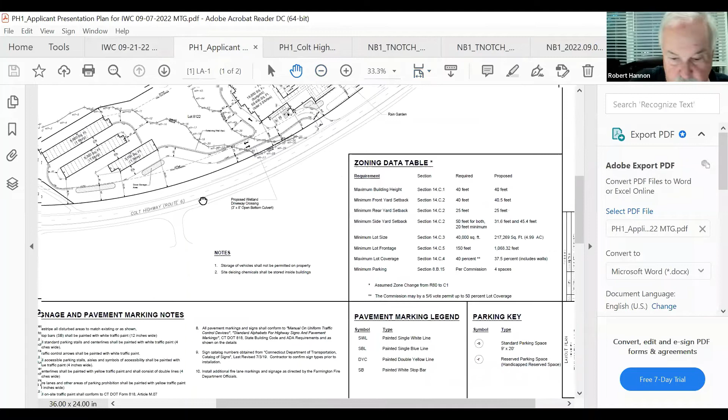Good evening, Mr. Chairman. I'm going to start off our presentation this evening. This is Robin Pearson, attorney with the firm of Alter and Pearson in Glastonbury, Connecticut, representing the applicant. With me tonight is David Ziaks of Hesketh and Associates, who has been the lead person on this application. I believe Anthony Zemba is with us as well. He is here, good. Yes, he is a certified soil scientist and ecologist with Land Tech, and did the original reporting filed with the commission, and is here this evening to provide testimony on the revised plans. Also here, I believe, is Matt Morris on behalf of the applicant. He's not part of the presentation, but I wanted to mention he is with us this evening.

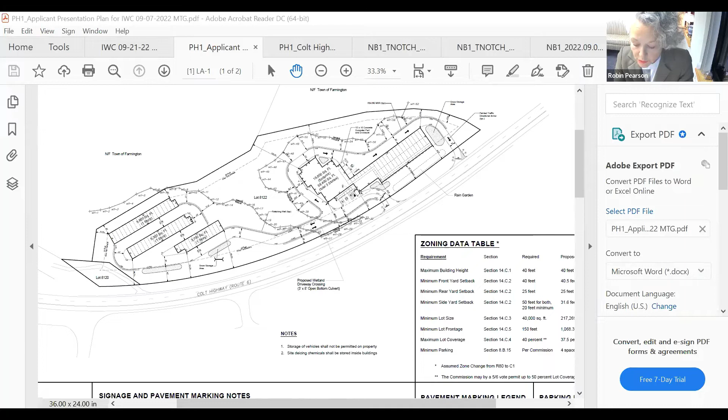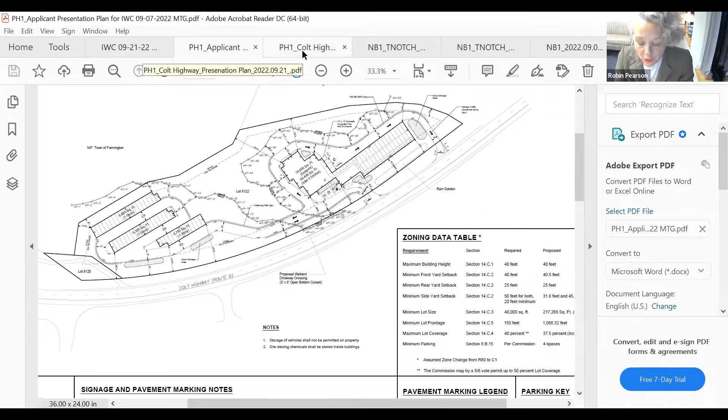So this is the third session of our public hearing review. At the last session, on September 7th, you received a comprehensive presentation by Dave Ziaks, who went through a number of changes made to the plans, primarily to increase the distance at the pinch points that exist on the plan before you that night, increasing the distance from the wetland boundary to either the foundation walls or retaining walls necessary to complete this project. He also covered peripheral issues, such as where we had now located snow storage, noted the reduction in impervious surface to 37.5% from 39.1%, and added additional information. This is not a complete synopsis of the changes, but importantly there was inclusion of pollinator plants in the wetland mitigation area along the driveway at the point of the wetland crossing. With us that evening was Tom Ryder, senior environmental scientist with Land Tech.

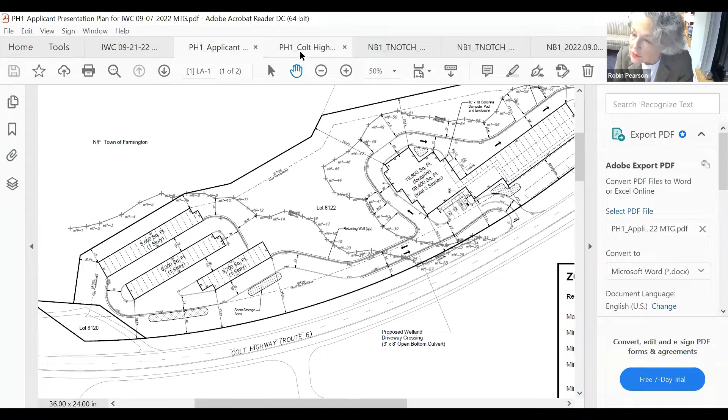I want to remind you that Tom Ryder testified that evening that he concurred with the conclusions of the Land Tech wetland report submitted with the application, prepared by Anthony Zemba, who couldn't be there on the 7th. He also confirmed, based on his review of the revised plans before you this evening, that he did not see any negative impact to the wetlands if the development were constructed as proposed. However, the commission still had additional information they were seeking, and concerns I'd broadly characterize as whether the narrow width of the crossing was acceptable and worthy of approval, and whether the building footprint's size in relation to the wetlands could be reduced to further increase separation distance. They also explored whether we could do a conservation easement.

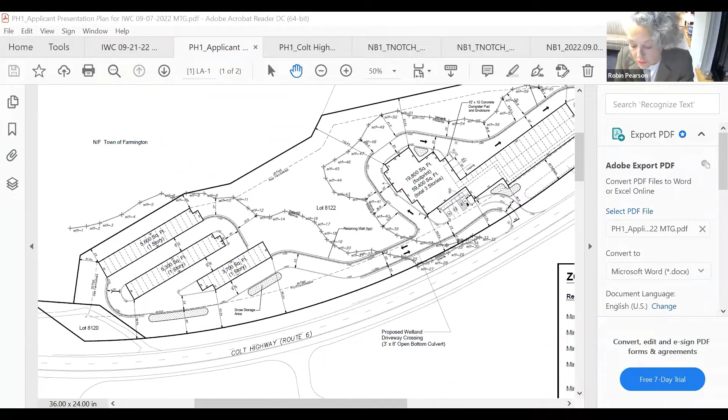David? Yes, good evening Mr. Chairman, members of the commission. I'm Dave Ziaks, a professional engineer with F.A. Hesketh Associates. We're located over in East Granby.

Since our last meeting, as Robin has been pointing out, we've been taking a look at some of the comments and recommendations from the commission. One thing we did is work with our local precast suppliers for the culvert crossing, and one of them will be able to produce an open bottom culvert that will allow us to go to a 12-foot span from the 8-foot span we currently have. We were successful in that, and we're proposing that on the plans at this time.

I just want to point out to the commission that the design of this crossing easily meets the design criteria the Army Corps of Engineers will expect from us for a general permit. It also complies with the Connecticut DEEP's stream crossing best management practices, found in Appendix G of the DEP's regulations and design guidelines for these types of stream crossings. So we'll easily be able to meet that criteria.

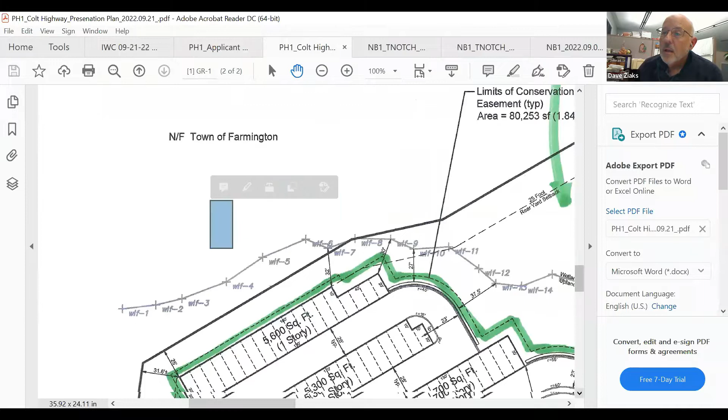One commission member asked us to look at the west end, the units closest to the wetlands, to see whether we could reduce those sizes to help with setback. We're proposing to reduce 3 more units there so they match the smaller unit at the end. That will increase our minimum setback from 30 to 32 feet in that corner, compared to the previous iteration of the plans.

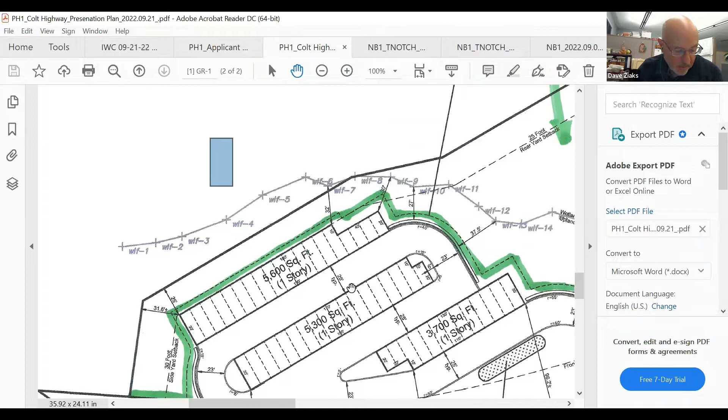As Robin pointed out, we also looked at providing a conservation easement, shown here with the green line. It's basically 5 feet in front of the outside perimeter of our development, resulting in a conservation easement of 1.84 acres out of the 4.99-acre total site. What's really good about this easement is that it will directly abut and extend the town open space to the north of us, about 70 acres of land, so that open space and conservation area will come into our property.

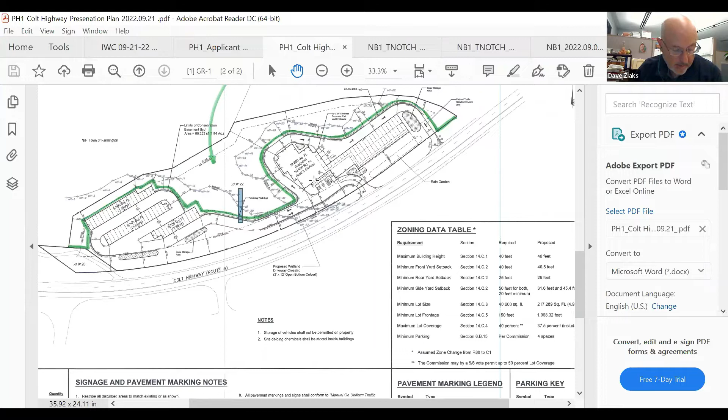The purpose of that is to ensure the commission that there won't be any future development on the remaining part of the land, or any attempt to nibble closer to the wetlands than what's shown on our plans this evening. So in addition to expanding the town open space, it also pretty much seals this property off from any future development.

There was an outstanding comment from the town engineering department, and we were able to make design modifications to the drainage system so that we capture and infiltrate the first 1 inch of runoff draining to those systems. That's an added design feature that brings us pretty much into compliance with the MS4 guidelines the town now operates under in its general permit with the Connecticut DEEP.

In general, we've made several changes to the plans to increase the setback, as Robin pointed out. We've added 2 small mitigation areas between the Route 6 corridor and our southern retaining wall to help mitigate the crossing. We've increased the culvert size — we originally started at 36 inches, and now we have the 12-foot span. We also started out with extensive use of retaining walls to minimize our encroachment into the footprint.

I think we've been very effective in that. Again, these retaining walls are not particularly tall — maximum height is about 6 to 7 feet, and that's only in certain areas. Lots of the retaining wall is less than that in height.

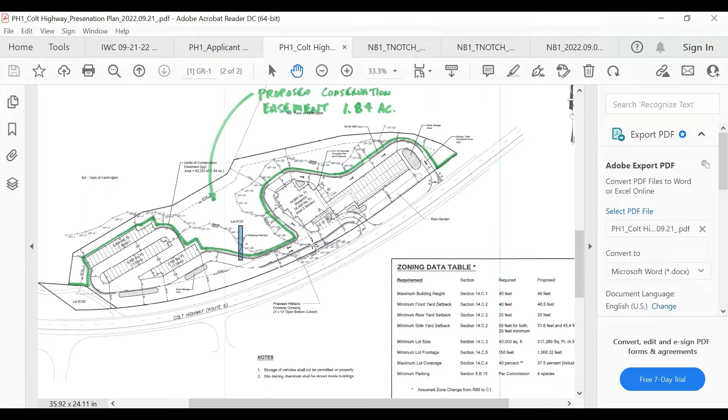No, the units on the westerly side were reduced from being 30 feet deep to 20 feet deep. But what that does is increase the distance from the units to the flag wetlands, 30 and 32 feet. Yes, I think you can see it in the labeling there. It's a little tough to see on Zoom. Yep, I see it now. That's much better. All right, I can see it much better now. Thank you, oh good, thank you.

Was that it, Mark? That's it, no other further questions.

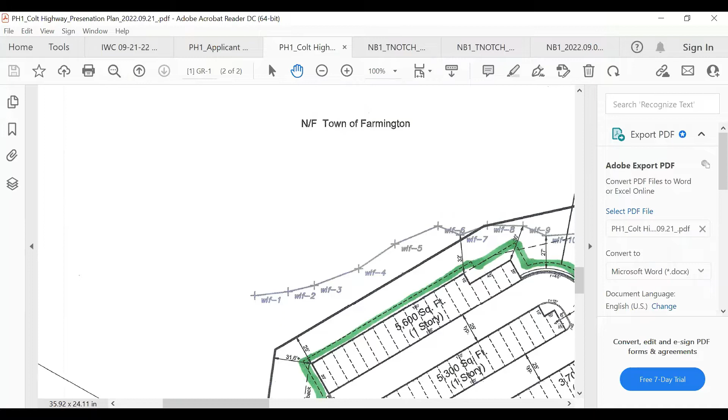I have one question, sort of an off-the-wall question, hopefully a simple yes or no. When you were laying out the design, it looks as though the portion on the east side of the property is like 19,000 square feet per floor. Is that correct, or a little over 19,000? Okay, 19,800 square feet. Yes, Mr. Chairman.

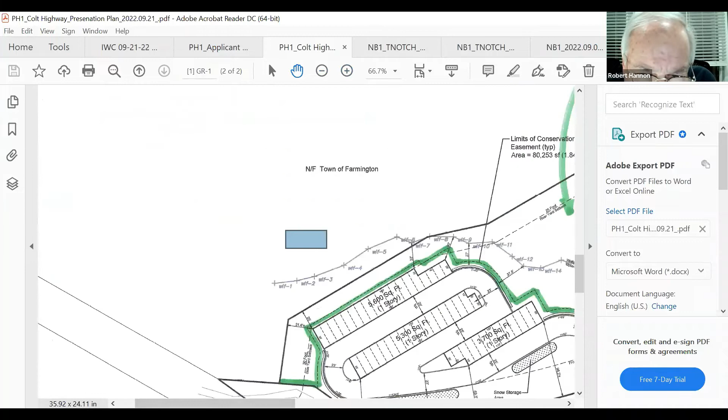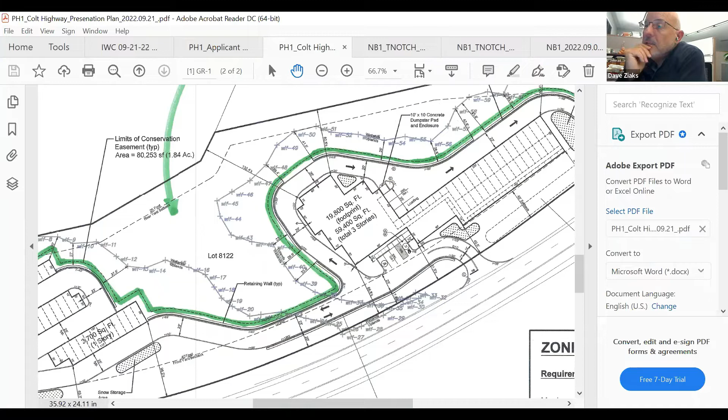Okay, was any thought put into maybe going four stories high and not having to cross the wetlands at all, to get a little bit more storage out of the area? There's been some talk about going to four stories, but the issue is we have a 40-foot height restriction in the zone. So you end up with less desirable storage facilities for the tenants due to the height limitations at four stories versus three stories. No, I just thought I'd ask, because that could have been a good mitigation measure of not even having to cross the wetlands, so I figured I'd ask to get it on the record.

I do not have any other questions.

Bruce, is there anybody from the public here? Let me check, sir. No, I don't have anyone from the public. But if anybody else would like to speak, just raise your hand. Nope, I don't see anything.

Okay, so I guess the question that I have for Attorney Pearson or anybody else on this group, do they have anything else they want to add or summarize?

Well, I would just like to point out, maybe Dave could elaborate a little bit more on that. He did put the information in his response to the town with the revised plans, but we did look even more closely at the wetland crossing, which is the only direct impact for wetland disturbance with this application. He did look again at the possibility of making two separate driveways and not having that crossing, but his information underscores that, working with the traffic consultant within FA Hesketh, it's really not feasible from a safety standpoint. He was able to increase the width of the culvert to make it a better situation with regard to impacts, which, once built, will be there, but the impacts will truly be temporary and are also tempered by the mitigation that's proposed. So I just wanted to reiterate that for the record.

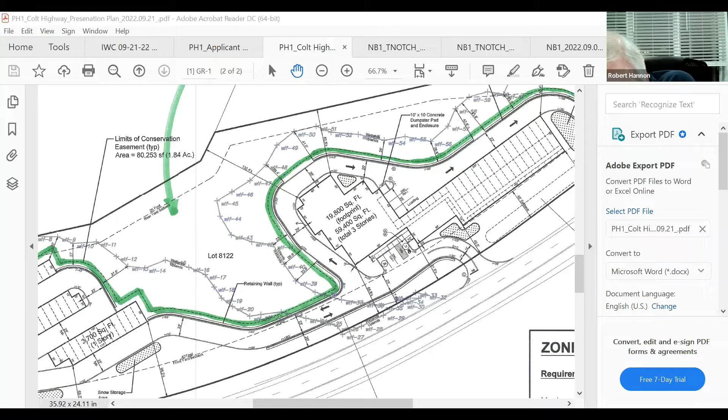So, do you want to discuss anything about that application then? In all honesty, I haven't really looked at it much in the last couple of weeks. I've been a little preoccupied with some family matters. Okay, I mean, we can talk to other members if they have any idea how they feel about it, now that all the information has been presented, we've got the last modified plan. I didn't have a chance to really look at it except for maybe about 5 minutes before the meeting, so I know that I'm not really ready to do anything. There's been a lot presented and I want to think about it. I don't know, do other commission members have any other feeling on it?

Folks ready? You looking at maybe thinking about it and trying to come up with a thought process for the next meeting? Yeah, the only reason I bring it up is just because to type up a resolution, I'd like to at least get some ideas of where we should be going with this. So for the next meeting I'll have something and then we can just add to it very easily.

Yeah, that's probably going to be the best bet. I know you've heard a lot of comments from commissioners, you heard responses from the applicant, so I think everybody has a pretty good handle of where we currently stand, especially with some of the modifications that have been proposed. So again, like I said, I'm really not ready, I haven't really thought about it. But if other people have a different opinion, I'm ready to go.

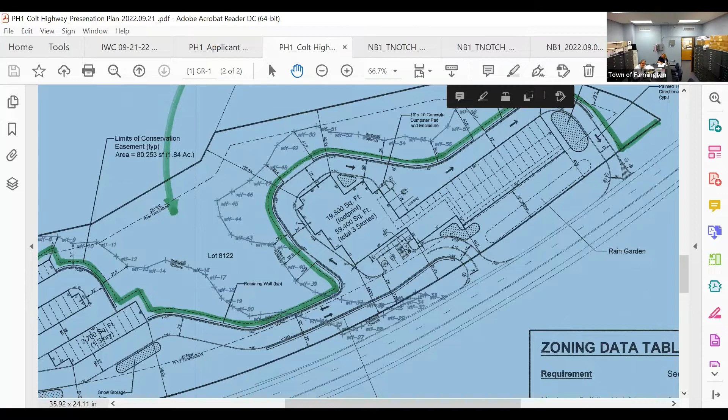And Mr. Chair, this is Mark. I think it'd be good to delay so Ned can participate in the final decision. Yeah, Sandy, will you be able to get out a CD to Ned so he can listen to everything that was discussed at the meeting tonight? Yeah, I can share the link of the recording with him. Okay, thank you. Okay, thanks, Mark.

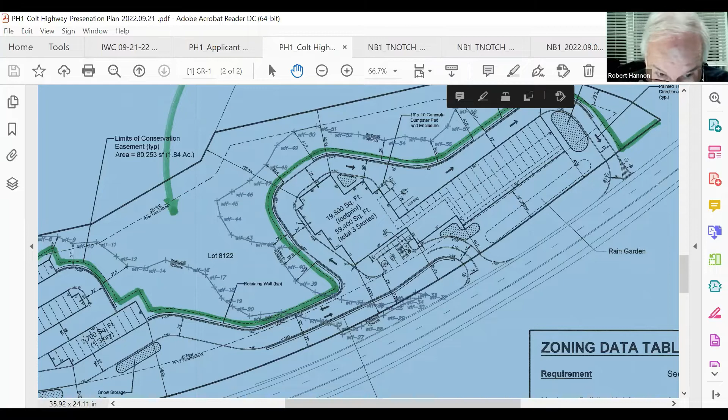Okay. Okay, so we know where we are here. Okay, go on to the next one.

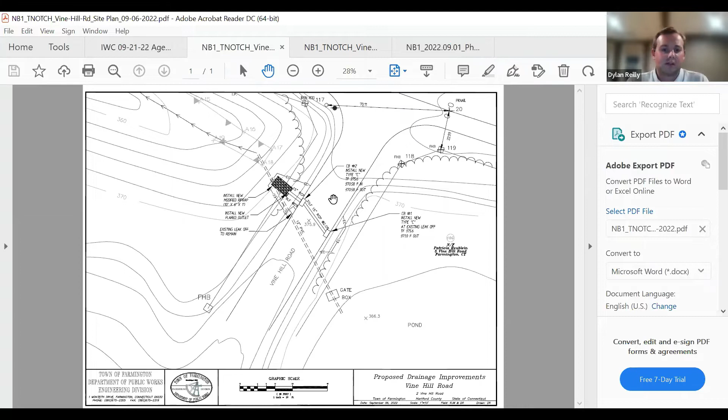Good evening, Chairman and Commission members. This is the Town of Farmington, 2 Vine Hill Road project. This is the original plan presented at the September 7th meeting. As you may recall—can you state your name for the record, please? My name is Dylan Reilly. Okay, thank you.

As you may recall, this is a rather small project consisting of the installation of 2 catch basins and an outfall lined with riprap on the 2 Vine Hill side of the road. The purpose of this project is to alleviate some of the runoff from the road that is causing erosion on both sides where the catch basin and leak off is. The leak off for the pond side is located directly under the catch basin, and the catch basin on the other side of the road is moved slightly upward due to the fact that we didn't want to cover the overflow pipe for the pond in the event that it needs to be repaired or worked on in the future.

So the remaining leak off will stay, and that's pretty much it from the old plan. Bruce, if you could go to the new plan.

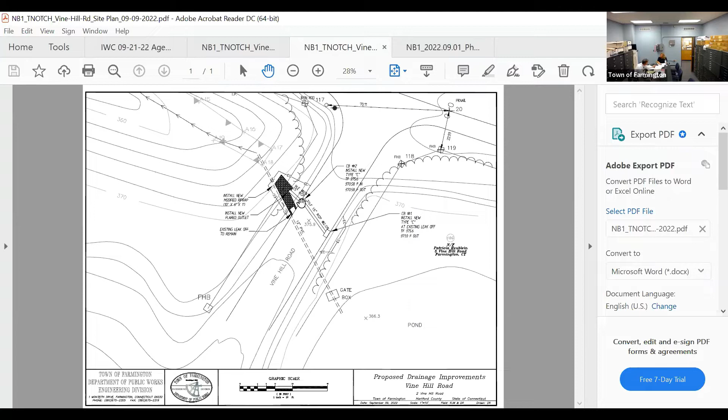Determination. Oh, sorry, I didn't get to that part. Oh, we have a determination first? Of significance? Yep. Okay, can I get, my take is it's non-significant. So I'm assuming others feel the same way, but we'll go through the list.

Rich? Yeah, I would agree on not significant. Okay. Bobby? Not significant. Dave? Not significant. Robert? Non-significant regulated activity. Neil? I agree. Mark? Not significant.

Okay, so first then, can I get a motion that this is a non-significant activity? So Rich moved. Second, Rich. Okay, have a motion. Who made the first one? That'd be Mark. Okay, Mark would be the first. Thank you. I have a motion on the floor that this is a non-significant activity. Those in favor, please signify by saying aye. Aye. Aye. Opposed, abstaining.

Okay, so now can I get a motion to approve the application as modified? I'll make the motion to approve as modified. Is there a second? Dave will second. By the way, Bobby is sitting in for Ned. As soon as Bob voted, I said the same thing. I said, oh. Just in case you were wondering.

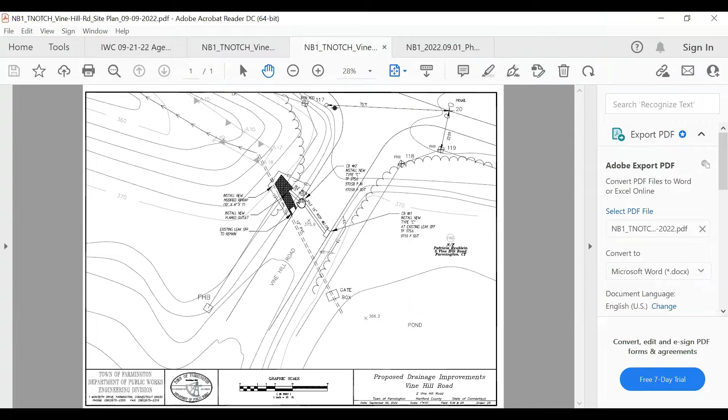No, I tried to pay attention, but so I have a motion on the floor to approve the application as modified, plans currently before us. All those in favor signify by saying aye. Aye. Aye. Opposed, abstaining. Okay, here's to getting it done before the winter. Thank you. Okay, good luck.

Bruce and Suzanne Polsky, 30 Hatters Lane. Suzanne, talked to her this morning. She's there. Are you still here, Suzanne? She said her contractor may not be able to talk till like 8:15. No, I am here, but I think Ken is on the Zoom also now. Is he? I don't know, oh, there he is. Ken, are you there?

Maybe Ken is muted. He's muted. Okay. He just... you start loading them in. Give him a few seconds. I gotta load it in. Okay.

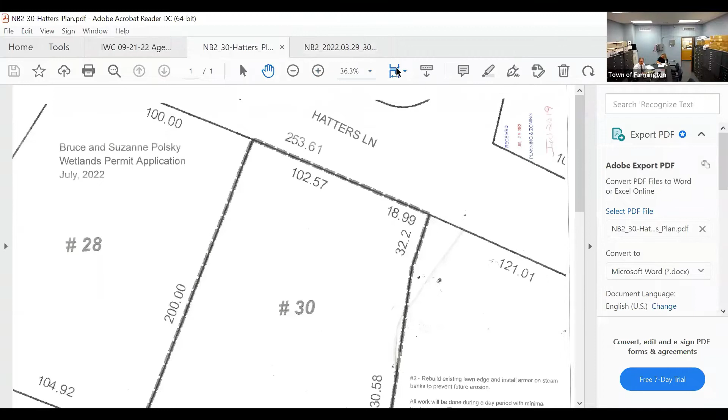I'm Suzanne Polsky. My husband and I have owned the property for 18 years. We have tried to be good stewards of the creek, but at this point we just need larger work to contain the erosion that's taken place.

Right now the creek is currently dry. I don't know what questions you might have. Hopefully I can answer them, and Ken is here to fill in the details.

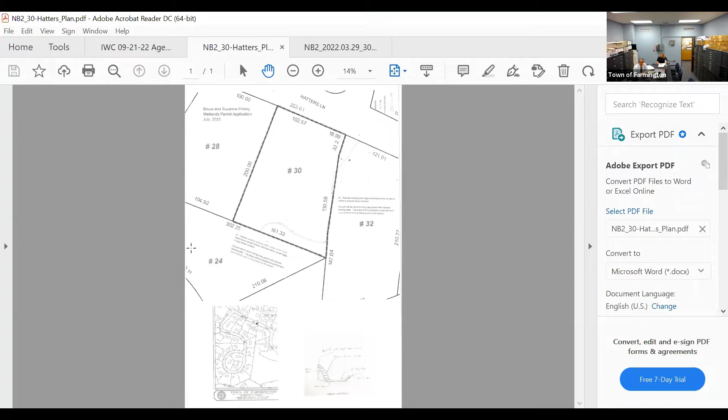If you don't mind, let me just jump in. There's an existing pipe that comes under Hatter's Lane. It's a storm drainage pipe. It picks up Colton Street and the mountain up to the north, flows along their side of the property line, comes around the back of the yard, then dips down and runs through the houses on Dorset Lane and eventually empties into the pond on Dorset Lane.

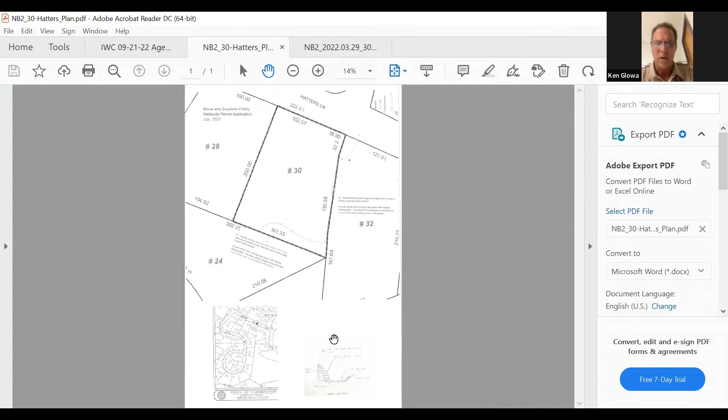Ken, is there anything you could add to how you plan on doing this? That sums it up pretty well. Basically, our plan is while the creek is dry to go in and clean a lot of the silt out and rebuild the banks with some riprap.

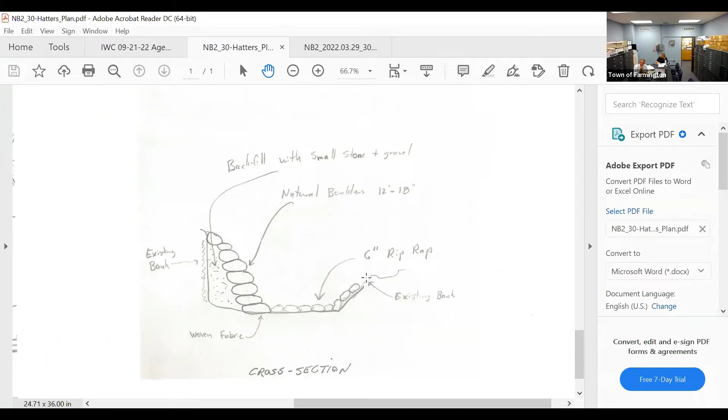You see that screen? Yes. All right, so the intention is to put in 6-inch size riprap, basically 6-inch diameter riprap. And then how thick will it be? It'll be a layer or two thick, approximately 6 to 12 inches thick on the bottom and on the sides.

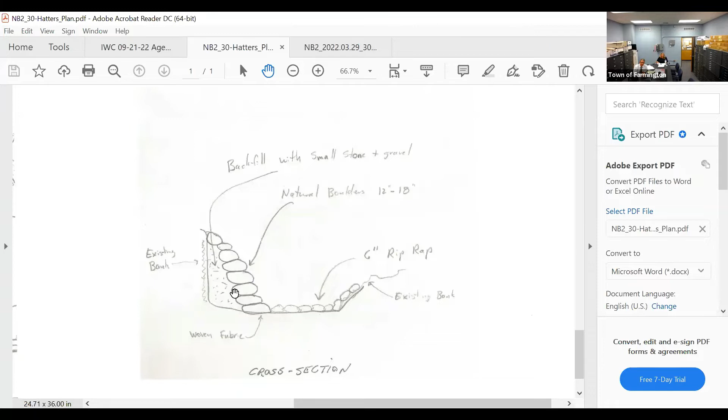And then on the pool side, you're just going to be resetting all those stones? Exactly, except this time we're going to put filter fabric behind them. The filter fabric will be on an angle like this, or will you be going vertical? No, it'll be on an angle like that. And then the areas where there's no stone, you'll have riprap on all 3 sides, bottom and sides. That's correct, since these stones are only by the pool, right? That is correct, and after that it'll just be riprap.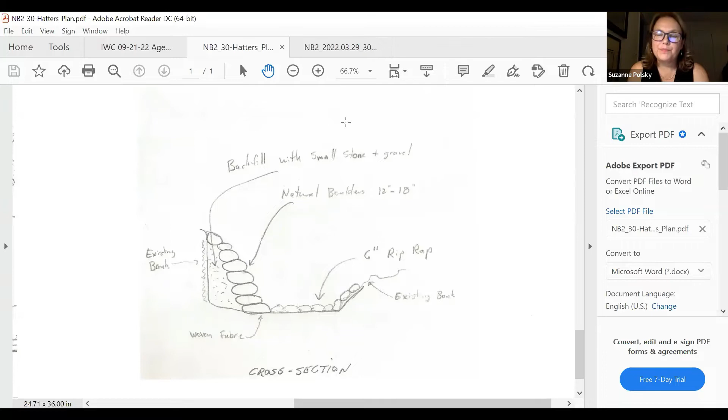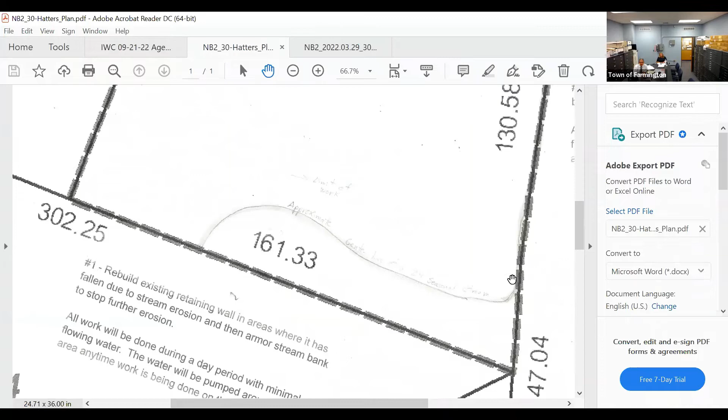But if I go back to the plan, it'll be like natural stone in here on the upper hillside. As you get past there, both sides will be riprap all the way up through here. That's correct.

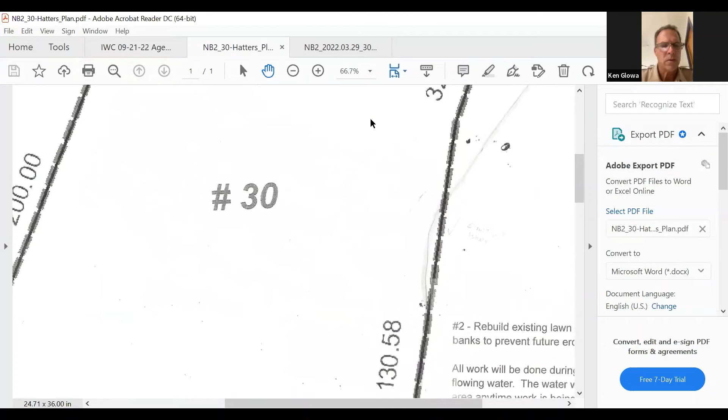And where are you guys going to stop? On which side? Up in here. Let me switch over to the photos. So you'll come around the corner. Yep, go up here, are you starting around here somewhere? A little bit farther up, closer up near the house. Oh yeah, right here, a little further up from there. Yeah, about in the middle of their house, just past that pine tree you see there.

Suzanne and Ken, any idea what you can tell the commission about the flow through there, the frequency? Well, when we get heavy rains it does come down quite fast, about 3 to 4 feet wide, the actual creek. So we get a good 6 to 8 inches but a fast flow. When there's light rain, it just trickles, but the heavy rains are what we're more concerned about, and we're getting heavier rains all the time. So it's become a concern.

Trying to determine the construction timing, when is it actually flowing now? No, I went and checked before, so it is all dry. So Ken, when would you plan on doing this work? It would depend on how this hearing went, but we plan on doing it during this time frame. We actually were trying to shoot for last month to do it when it was really dry. And when I spoke with Bruce out there, if water did start to come up while we were in the middle of construction, we would just sandbag one end and pump the water around our work area.

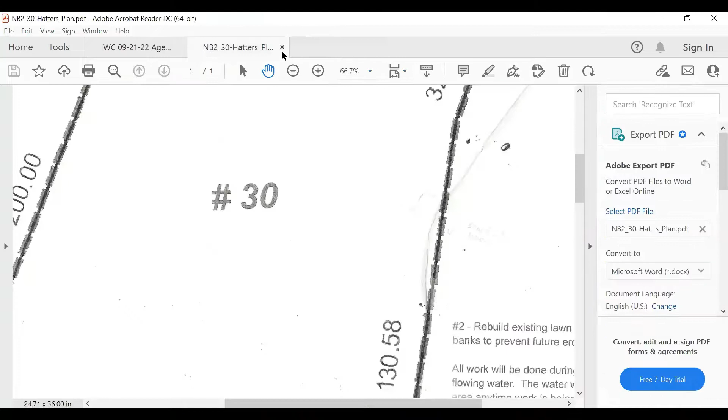And then have a motion to accept the application. So moved, Rich. Is there a second? Second by Eisner. Motion on the floor to accept the application. All those in favor, please signify by saying aye. Aye. Aye. Aye. Opposed? Abstaining? So be it. So we'll schedule this for the next meeting.

All right, thank you. Thank you. Thank you.

Number 3, 80 South Road LLC and Sager Development LLC.

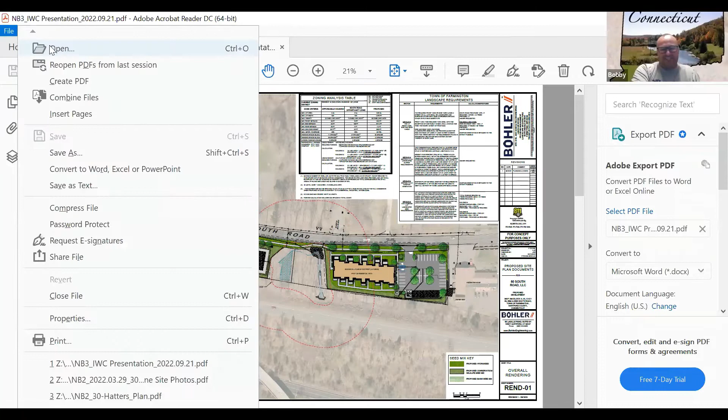I'm assuming, Bruce, you haven't changed the agenda on me this week? No, God, wow, I'm just checking. Little bitter. I wanted to make sure I was reading from the right document. Oh, wrong one, where did it go? Jeez, hold on, supposed to be the other one. He changed it, but he's giving you the wrong document. No, I did, whatever, I moved the one up. Yeah, but it's the other one they sent me. We're all friends here, you know.

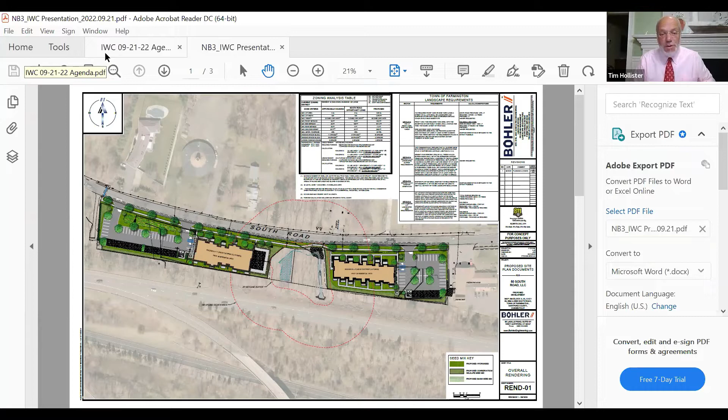Bruce, if you can't find it, we can work with this one. He's not in the room. We also can resend it through. I'm sure he's got it.

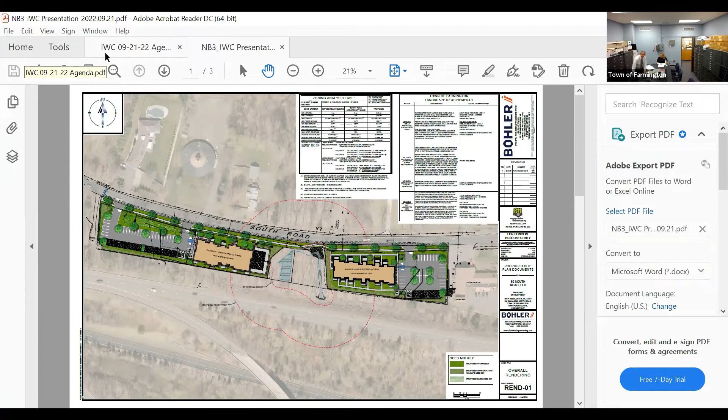I apologize to the applicant and the commission, thought I had them all in there, and I got the old one in there by mistake. Here we go, sorry about that. Very good.

Mr. Chairman, I'm ready when you are. Go ahead. Great, thank you.

Good evening, Chair Hannan, commission members, town staff. I'm Attorney Tim Hollister, representing the applicant. With me tonight are Phoebe Sager, principal of 80 South Road LLC, and our consultants Megan Raymond from SLR Consulting and Jeff Bord, professional engineer from Bohler Engineering. With your okay, we have a brief preliminary presentation, and I want to thank Mr. Sear for his help in getting this booted up.

The property is along South Road on the south side, 2.9 acres in total, 3 parcels, as you can see on the screen. The proposed development is 65 apartments in 2 buildings. Some of you may remember this site. In 2018, the western half, shown as 8864, was the proposed site of a restaurant called Andy's Italian Kitchen, on the western parcel, which was given approval by this commission as no significant impact, but that development did not go forward.

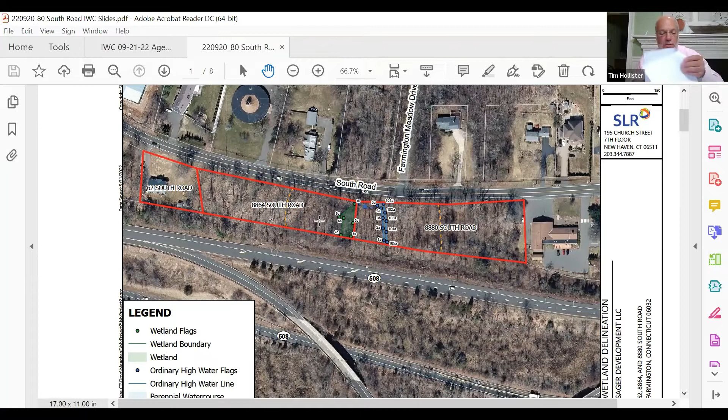Great, thank you Tim. Good evening. For the record, my name is Megan Raymond. Can everyone hear me okay? Yep, I can hear you good. Great. I'm a professional wetland scientist, registered soil scientist, certified floodplain manager at SLR Consulting, 195 Church Street in New Haven. I'm a principal scientist there and the lead of wetlands and waterways.

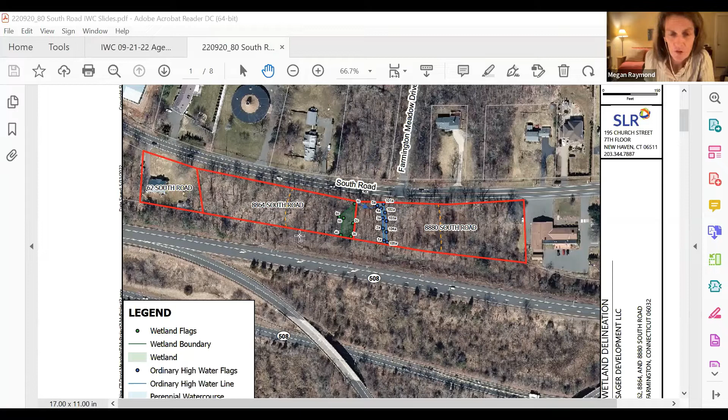This is a parcel that I became involved with in December of 2020, flagging wetlands out on 8880. Actually, I started earlier on 8864 with Andy's Italian Kitchen back in late 2017 and early 2018, with the wetland delineation on just that parcel, and was involved in the permitting process through your local commission at that time. Then the study expanded in late 2020 to encapsulate the parcel to the east, 8880 South Road. And later, in the last year, 62 South Road was added to the compendium of sites.

Megan, let me interrupt for a sec. I believe the house at 62 South Road has already been demolished. Yeah, I thought I said had. Sorry if I didn't say had, but thank you for pointing that out, Tim.

So obviously we have a very long linear piece. It's about 1,400 linear feet of frontage on South Road, and in depth a little bit over 100 feet wide. There's been various degrees of development.

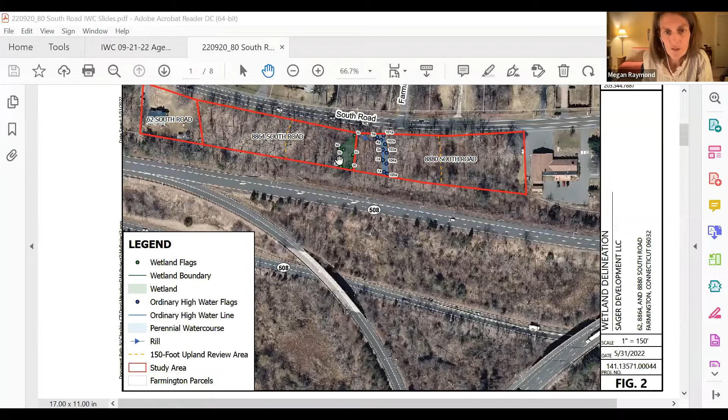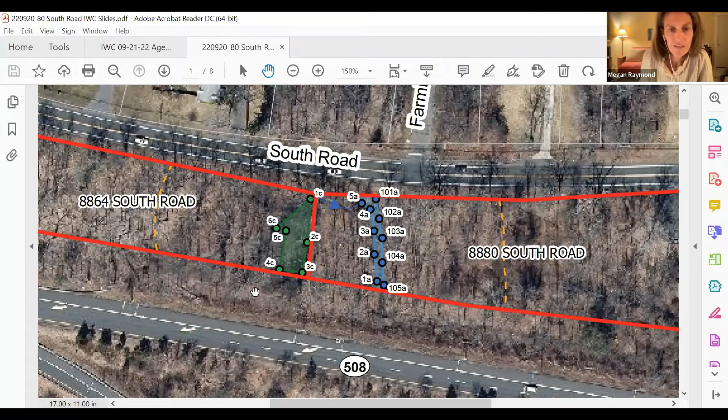And there is a wetland on the eastern portion of 8864. There's a forested depression underlain by Wilbraham silt loam soils. It's an area fed by some groundwater discharge as well as stormwater runoff. There is an embankment to the 84 connector that does shed some water seasonally onto the site from the south.

That wetland area does have some seasonal inundation, which is why we expanded our study in the spring of 2021 to look for vernal pool activity. And that did come up in the Andy's Italian Kitchen review in terms of the potential for that area to function.

But given it's a very shallow hydro period, we don't have a sufficient water column to support that. As you guys, with your experience, would see landscape position wise, we don't really have the physical characteristics of a vernal pool, nor a landscape position supporting a viable population of amphibians here. 62 South Road has no wetlands, no upland review.

Again, this small depressional forested wetland on 8864 occupies about 2,000 square feet, so about 4% of the overall 1 acre site. Moving on to 8880, we have a drainage corridor on this site bounded by ordinary high water.

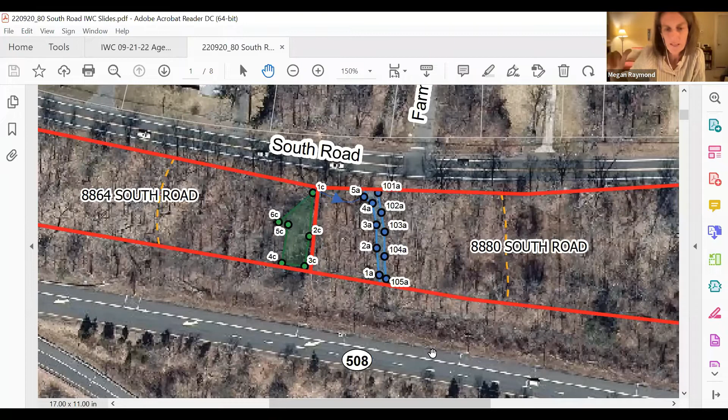It's about 110 feet that runs through the property from north to south. It exits from twin 36-inch pipes, travels to the south, and then enters twin 36-inch pipes that carry discharge under the 84 connector through the median in a pipe, and then outlets just south, kind of in the cloverleaf of 84 itself.

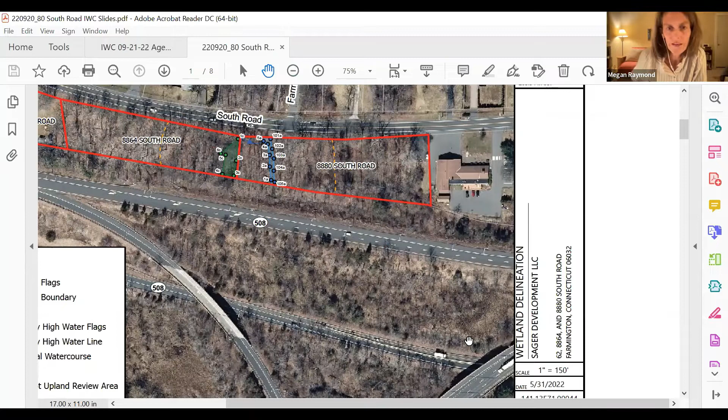From there, surface water travels about 0.16 of a mile to outlet into Batterson Park Pond, so about a sixth of a mile away. The water course is about 8 feet wide, about 3 feet deep. It's an unconsolidated base with sediment and some stones. There is a degree of riprap at the outlet of the 36-inch twin head walls.

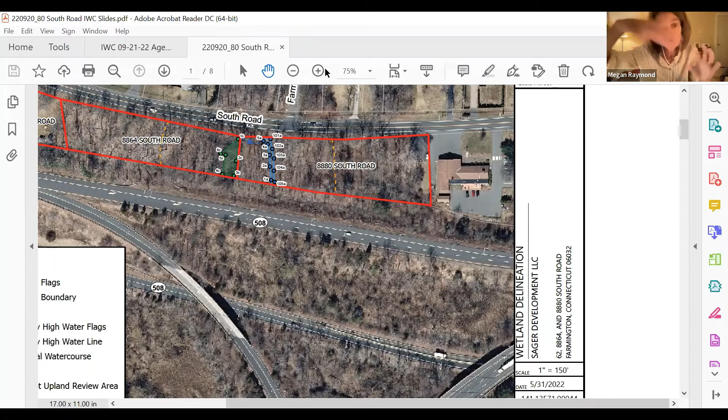Functionally, the primary function of that water course is truly conveyance. It appears to be an engineered feature. It does drain a wetland that exists north of South Road. In between Middle Road and South Road, there's a wetland system that appears to have been channelized over time, so there was some drainage conveyed, pushing drainage to the south onto the piece.

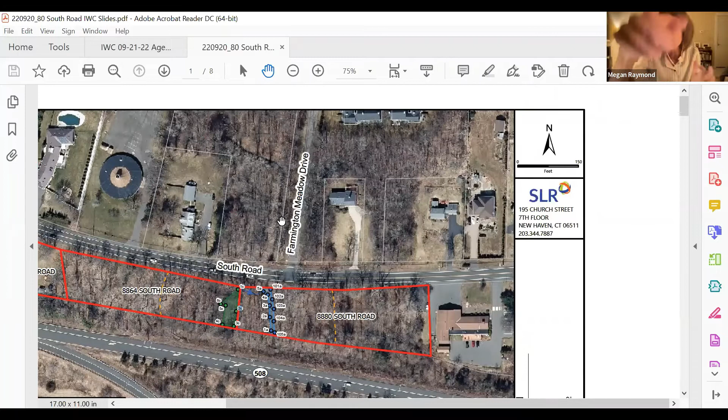The banks are quite engineered, very linear, a long linear feature. As it presents on the site, there are no meanders, no structural elements within the water course itself. So we're looking at conveyance primarily for that water course.

Moving to the wetland system on the west side of the site, we do have some constraints as it relates functionally to this wetland, just given its small size. There's not really an ability for it to contribute to a significant degree to wetland function.

However, given where it sits on the site, there is the opportunity for nutrient assimilation, obviously groundwater discharge. We have sediment toxicant retention, again, because it can hold water and store water and assimilate with some fluctuations with groundwater. We were involved in laying out the site plan, and these observations as they relate to wetland functionality directly informed some of the site layout.

And again, looking at these features, I'm going to turn it over to Jeff in a second. I'm concluding now. This wetland and water course occupy quite small percentages of the overall sites, but upland review areas on either parcel of 8864 and 8880 encumber about 40% of those sites. So at that point, that concludes my overall description of the resources, and I'd like to turn it to Jeff to get into the site plan. Thank you.

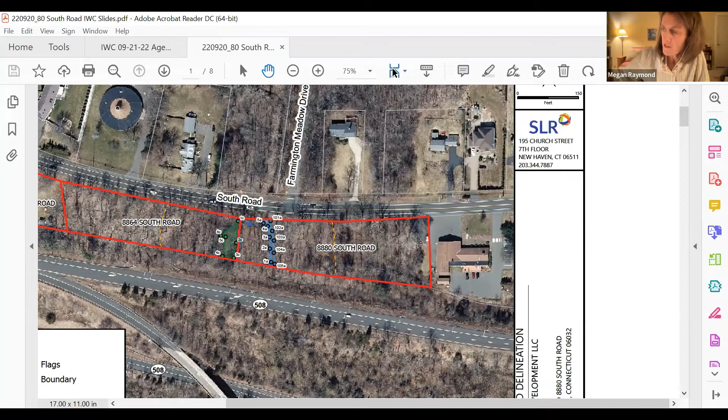Thank you, Megan. For the record, my name is Jeff Bord, professional engineer in the state of Connecticut with Bohler Engineering, located at 65 LaSalle Road in West Hartford, Connecticut.

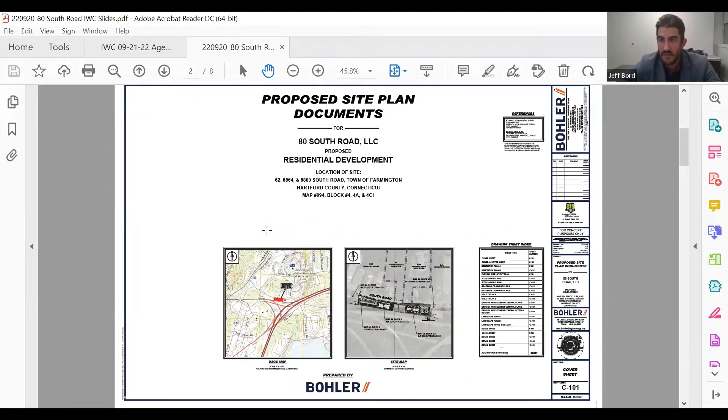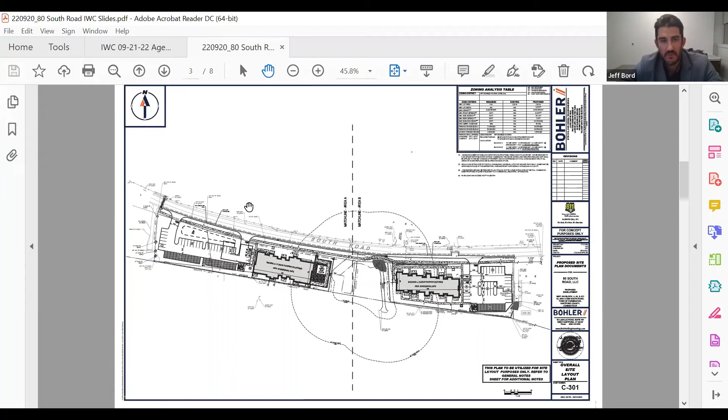What you have here before you, I believe, is just the cover page to our proposed site plan documents. It lists out everything that was in our set of drawings. This is just a black and white version. If you go to the next slide, should be the colored version—I think this one's probably the best talking one here. So what you're seeing here is just a colorized version of our site plan with an existing aerial turned on in the background.

We also provided our landscape plan on top of it, so it's the same site plan you have in your packages with a little bit more information provided. For the purposes of my presentation and testimony, north is to the top of the page.

Proposed development consists of 2 multifamily residential structures on either side of that existing channel. Building A is a 3.5-story, 36-unit structure on the western side of the site with a footprint of approximately 11,350 square feet. Building B on the eastern portion of the site is a 3-story structure with a total of 29 units, with a footprint of approximately 10,425 square feet.

Starting on the west side of the plan for Building A, we have 2 full access driveways onto South Road where we're proposing 52 parking spaces, 2 of which are handicap accessible adjacent to the building footprint itself. There's also a proposed amenity space to the east of that building that consists of porous concrete. We're currently developing what's going to be in that amenity space, but we took significant care with the existing wetlands being in close proximity to provide some unique landscaping and stormwater features that I'll get into momentarily.

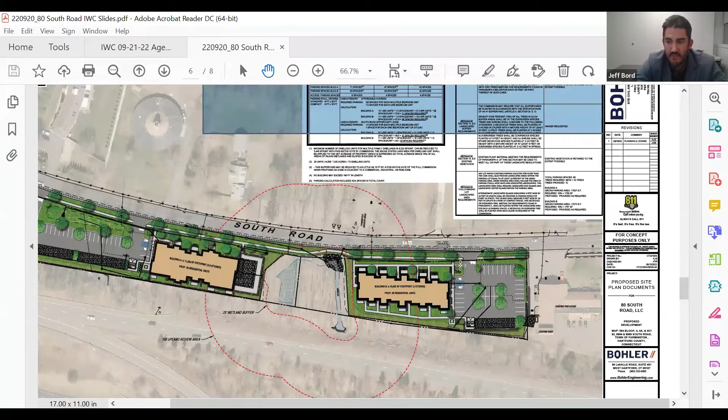It's a quite robust landscape plan given the wetlands on site. There's a variety of native species, a mix of shade trees, ornamental trees, evergreen shrubs, ground covers, and ornamental grasses. We paid particular attention to the southerly border, up against the existing channel off site between 84 and our property, and then the eastern and western boundaries in closest proximity to the culvert and the wetlands, to provide a New England conservation wildlife seed mix along that perimeter. We had coordinated with town staff, and I believe it was their opinion that we should be providing an invasive species management plan or removal plan, which we are willing to do.

Part of what we do as civil engineers is comply with the 2004 Connecticut Stormwater Quality Manual and the MS4 permit currently in place. So on a site with this many constraints and wetlands and how narrow it is, we were able to fit quite a bit of natural best management practices, as well as some subsurface practices, to meet water quality measures, treat that first inch of water quality, reduce peak flow rates for the 2, 10, 25, and 100-year storm events, and improve the water quality from what's out there today at a reduced flow rate.

Everything right now drains from north to south, and per the survey we provided, there's an existing channel between the southerly property line and the I-84 ramp that goes down to that culvert. So both sites—the Building A side on the west flows east, and the Building B side on the east flows west—ultimately get to that channel. As Megan has described, that's really a conveyance channel that we look to take care of, matching those peak flow rates and also treating water quality at the same time.

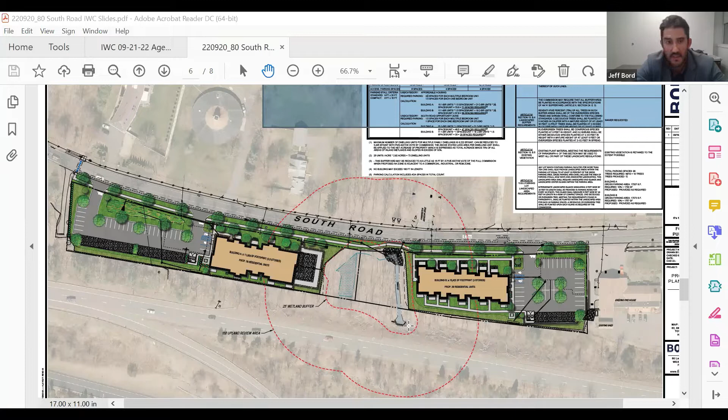Another big thing in working with the town in the past has been soil and sediment erosion control, so we've designed the site in accordance with the 2002 Connecticut Soil Erosion and Sediment Control Guidelines. What that means is we have silt fence along the perimeter and down-gradient areas. In working with the town in the past, I know they've requested silt socks, so we've also added silt socks on those low-lying areas from a grading standpoint.

So we'll have the redundancy of the silt socks and silt fence in the sensitive areas on the down gradient side. We have inlet filters at all the surrounding catch basins, and then slope stabilization where necessary. And I believe from an engineering standpoint, that's the majority of it. I'd be happy to answer any questions once we get through the significance portion of this with the wetlands piece. And with that, I can turn it over to Megan.

Thank you, Jeff. You're welcome.

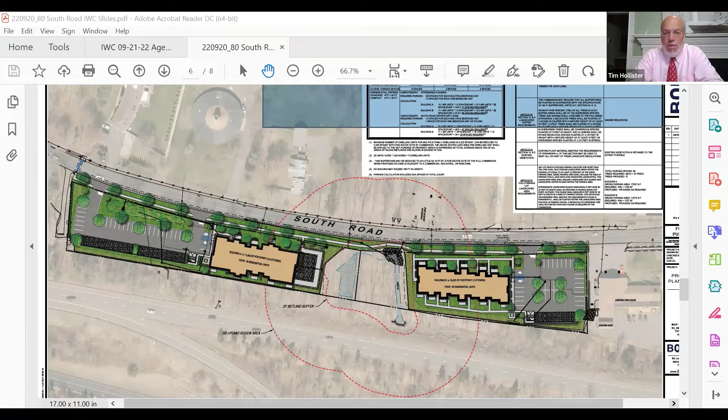Great. Thank you, Megan Raymond, professional wetland scientist, registered soil scientist with SLR. Jeff really did a great job describing the overall components of the site plan as it relates to potential impacts to wetlands. Obviously, we're not looking at direct activities here. We evaluate indirect wetland activities as it relates to short-term and long-term potential.

Having the comprehensive sedimentation and erosion control addresses potential issues or effects to the wetland in the short term. Looking long term, a comprehensive multi-dimensional stormwater management plan will allow for maintenance of hydrology to that small wetland, which is important, as well as maintenance of function overall for both the wetland and the water course. We do have an opportunity to improve some of the road runoff from South Road. We're installing some catch basins and doing some other improvements overall to provide some benefit water quality wise in this small sub-watershed. It's about 0.16 of a square mile that drains to Batterson Park Pond.

We did walk through, or in our review, looking at this site as it relates to potential for significant wetland activity. We're not looking at any deposition or removal of material from the wetland area. We're not modifying the natural channel or dynamics of the water course. We're not diminishing the capacity of the wetland to provide wetland functions or to support any type of habitat that presently exists, where the sedimentation and erosion control is addressing the potential for turbidity, sedimentation, and siltation. We're not increasing or resulting in the pollution of a wetland or water course.

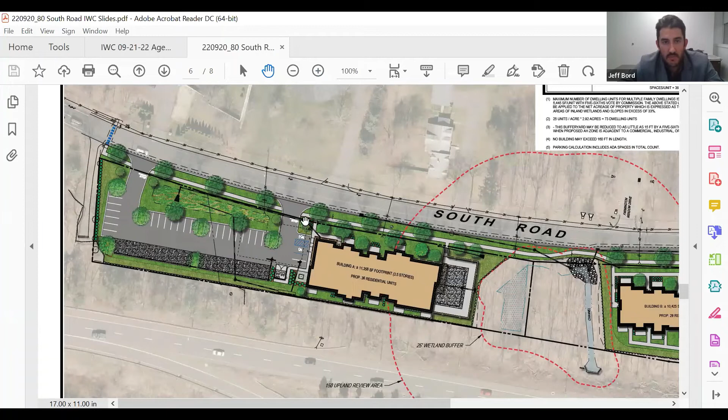I can walk you through in detail. On the west side of the site for building A—if Bruce can zoom in there—we have a depression in front on the north side of those parking stalls that handles the roof water. The roof water comes out the northwest corner of the building into that depression, and then a high level overflow takes it to the rear of the site, treating water quality through that area.

The remainder of the parking lot drains to the porous pavement area. A perforated pipe connects at the base of the pervious pavement into an underground water quality infiltration basin there, before both discharge through a level spreader at the rear. That matches and mimics the existing drainage patterns going to the rear of the site now—right where that level spreader is, just off the property line, maybe 5 feet from where the existing swale begins and runs down to that channel.

One unique thing we did, coordinating with the wetland scientists in the front of the building—it doesn't show great on this plan, but between the building and the sidewalk in the right of way, we have a water quality infiltration basin that extends basically the length of the building. There's a small water quality swale hydraulically connected to a small rain garden just north of the amenity space, ultimately discharging through a flared end section prior to the wetland area, about 35 feet off the edge of the wetland at the discharge point.

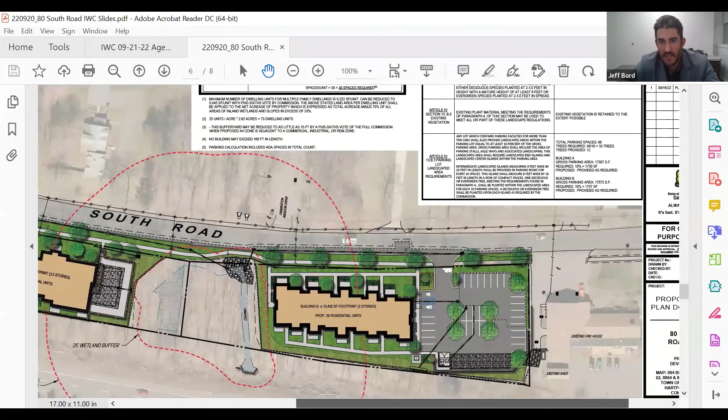That's building A. For building B, we have a small infiltration trench shown in our grading plan in front of the building, treating water quality for the small amount of water landing there. Roof water heads east into an underground detention system, shown dashed in black through the parking area, before discharging out to a level spreader. Similarly to building A, the porous pavement here has a pipe that goes back into the underground system for additional water quality treatment.

So we're in excess of what's recommended by the 2004 water quality manual for the 1 inch storm and the MS4 permit, and feel this plan is consistent with all those regulations. The other thing I didn't mention is that level spreader, just like on the other side, is about 5 to 10 feet off the existing swale that goes west to that channel. What's out there today overland flows back to that channel, and we're just putting it through that level spreader after treating it, whereas now it just sheet flows off untreated across the property.

Very good, thank you, great explanation. You're welcome. Bobby? No questions, great job, thank you. Rich?

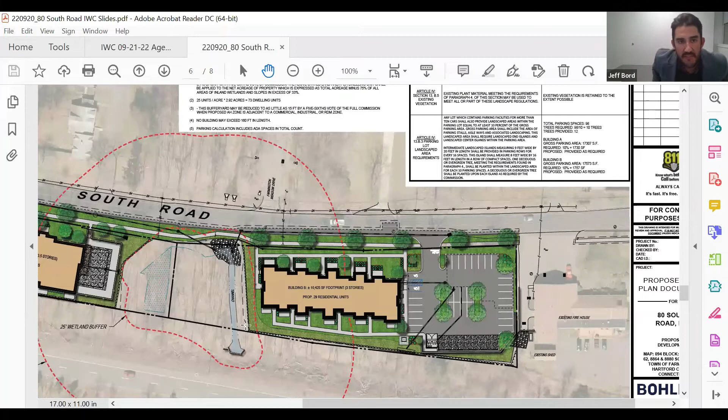That is correct, our grading limits are basically where the shading goes. On the building A side, on the left, you can see where the green hatch stops is basically our grading limits now, and that was to get the flared end section in. We've respected the wetland on the overland wetland there, the forested wetland as Megan referred to it.

I think ultimately incorporating that rain garden just north of the amenity space—and it's hard to see in this image, but between the edge of our development and the edge of the amenity space, there's that same New England wildflower conservation seed mix we're planting back in there. We're also going to remove any invasive species within that vicinity to help further bolster the native plants that are out there today.

Could you describe the tree canopy that surrounds the swale and wetland area? Yep, it's relatively high. I took a walk yesterday. I know Megan can probably speak to it a bit more. In the vicinity of that, it is pretty high. There is some underbrush, but Megan, I don't know if you want to weigh in on that from your walk.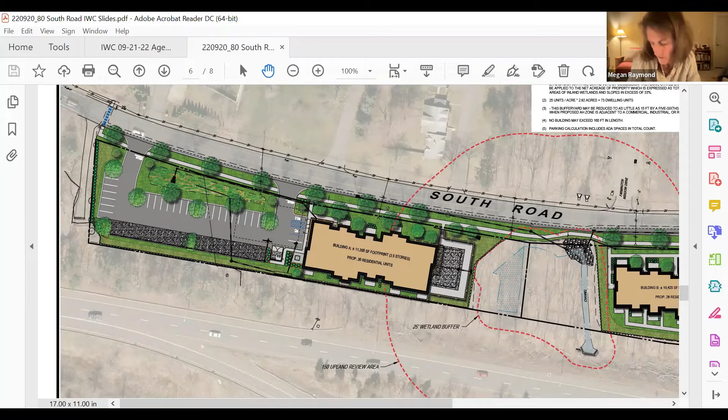Sure, I mean, you'd characterize the wetland area to be a forested wetland. There's some red maple trees, pin oak. As you move to the west, it's oak dominated, some hickory. The western side does not have as much underbrush. If you move to the east, there is more of a scrubby shrub layer on that side of the parcel. But it's definitely wooded with a variety of species, upland and wetland: oak hickory in the upland, and maple pin oak in the wetland area.

Okay, thank you. Yeah, I'll have to take a site walk to look at it, but it seems that we're clearing trees awfully close to that wetland area. We'll have to see what effect that might have on the canopy. That's all I have, thank you.

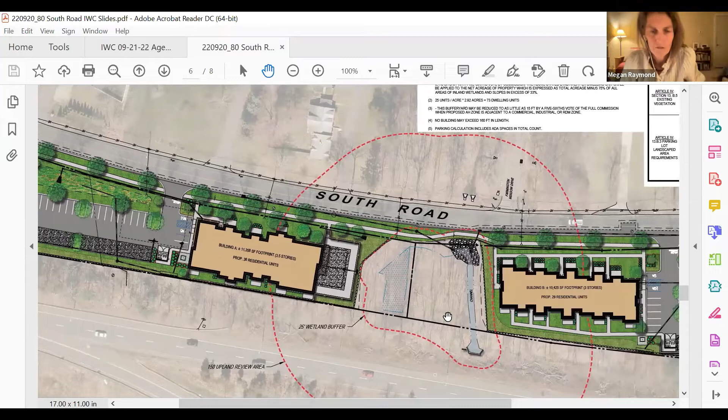I think, Megan, you were talking earlier that across the street to the north of the property, there are two 36-inch pipes. Is that correct, that are draining into this area? That's right, it's twin 36-inch pipes that convey water beneath South Road. And so it looks like there are some proposed riprap there to stabilize any water coming through there, and then it's a drainage swale that was there. So the piping wasn't extended through the property, is that correct? That's how it appears that it was engineered.

I was looking back through aerials today. I didn't go back that far, but it's present in the 80s. It does look like, its origin appears to be an engineered feature, just given its character.

Just to clarify, the riprap shown there that looks rather dark, that's actually on the existing survey. There's just a small portion of that where we're connecting in a flared end section that we would just be replacing in kind, basically. But all of that black riprap you see is not our proposed work as part of this application. That's technically on our survey right now.

Okay, but it's just an existing drainage swale, correct? You're not proposing any piping or anything along those lines? Correct, and we're not covering the open channel. That 135 feet of channel, 110 on the site, will remain open.

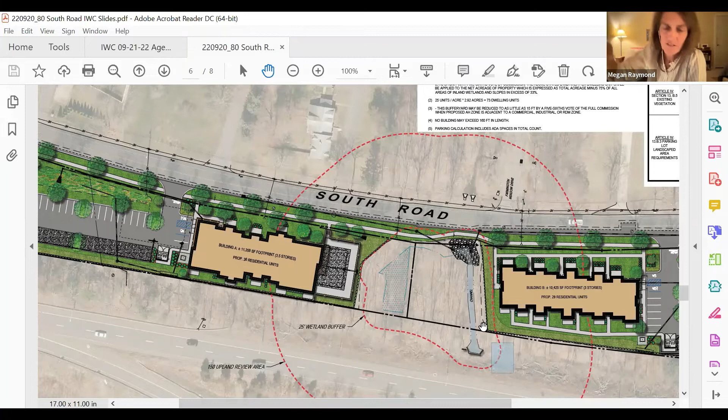You can see it at the southern end of 84. Based on the proposed development, the same water that's getting through there now via the two 36-inch pipes and the 12-inch pipe under 84, we've reduced those peak flow rates currently getting there, so that stormwater conveyance channel will continue to function as it does today, even after our proposed development's built.

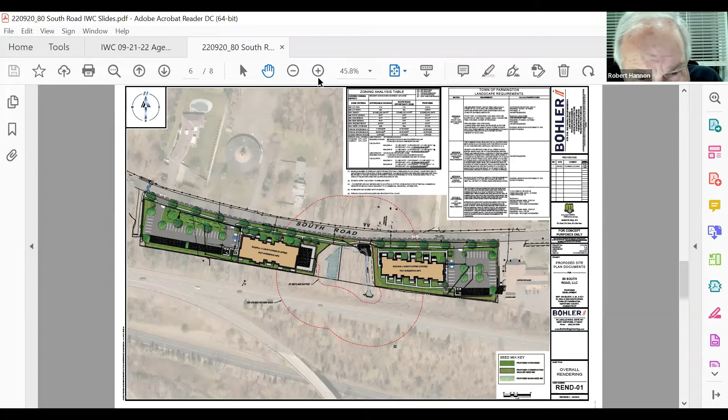Can you give me a quick highlight as to the level spreaders and how they're proposed to be constructed? It's probably in the details, but I haven't seen the detail sheet. Yeah, I believe they vary in length, though both of these are probably very similar. I think they were about 15 feet in length, 18 inches wide, consisting of a modified riprap, I think a 2-inch stone, but I will double check the detail.

We did include, as part of our stormwater management plan, an operations and maintenance manual, given we were able to fit so many different types of best management practices here. That manual, albeit buried in our drainage report, is one of the appendices, and we have maintenance measures for each of these BMPs: the rain garden, the level spreaders, the porous pavement, the infiltration basin. So all that will also be included.

Oh, sorry, I had it on mute because I've got the fire engines going on behind me and I didn't know if it'd be blocking everybody else out from hearing.

No worries. What's the maximum flow rate for the water flow going to the level spreaders?

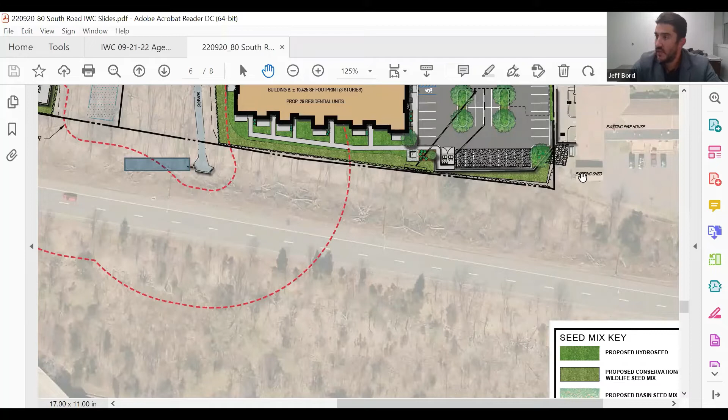You'd have to give me a minute to pull that up. Let me flip through our drainage report. The flow rate is relatively minimal because we're retaining water within the undergrounds, but I'd have to get you the exact number since it varies from storm event to storm event. We have a couple different tables within the body of our drainage report that spell that out. But it's relatively low, given we're mitigating the flows from the outlet control structure just prior to that level spreader. If you head up that conveyance pipe from the level spreader, there's an outlet control structure where we're holding back all of those flow rates. Okay, thank you.

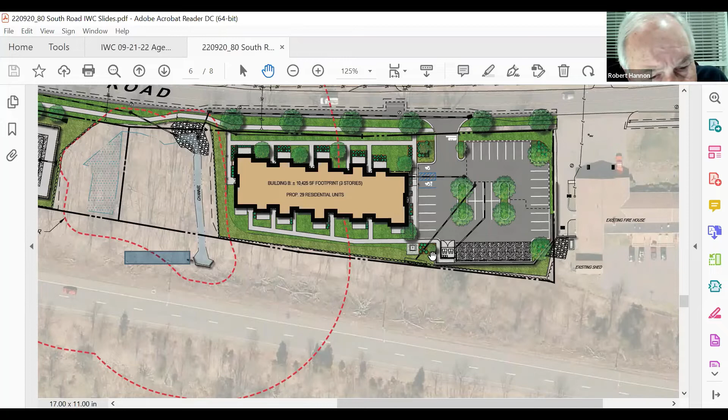Shannon, I have a technical question for you. My understanding is there could conceivably be some time constraints here, and I know a number of people are talking about a potential site walk, which we wouldn't be able to go back and make a decision on until the next meeting, which I think is October 5th.

Yes, sir. And if it was determined at that point that we were looking at this as a significant activity, or the commission felt it important to do a public hearing on this, what would the earliest date be that we could hold the hearing? Would we be able to do something on the 19th?

This is Shannon Rutherford, the town planner. We have looked at that, Mr. Chair. Attorney Hollister, feel free to chime in. I think we've talked about this at length with the applicant. If the determination is not made until the first meeting in October, then the hearing would have to wait and open in November.

I think, and certainly the applicant can chime in here, if there's a thought that the commission may want a hearing, I believe it's the applicant's thought at this time.

All right, okay. So I think that takes care of this particular issue. So I think we're good there.